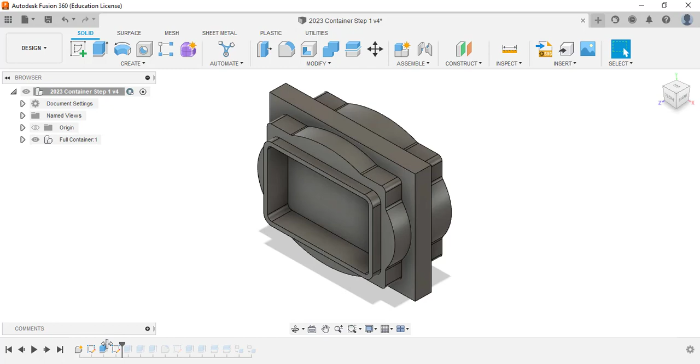So I'm going to go ahead and scroll my timeline all the way back to the beginning. The first sketch I made with the sizes that we have of our block. Now these sizes are kind of arbitrary because I would take a dial caliper to get the exact size of the block, but you could also do that in your toolpath. So either way would work. My suggestion is right now, just to make it easier, make it 4.5 by 3.5 or whatever your sizes are.

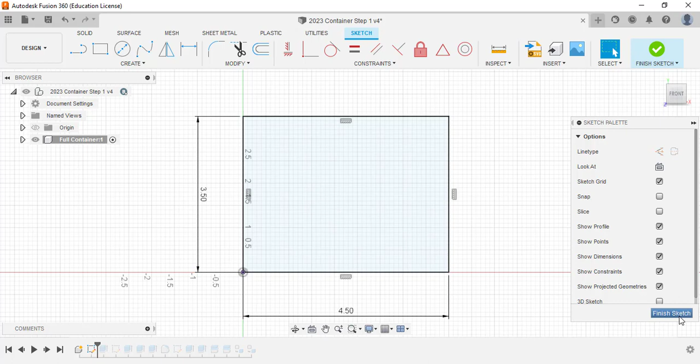After I finish that sketch, of course I extruded and I have my entire block that I'm going to deal with. Now I'm going to do subtractive modeling from here on out. Let's look at the first sketch, which is the most important one. There's a lot going on with this sketch, so I'm going to get rid of the constraints to hide some things and even some dimensions so I can see what's going on with the sketch.

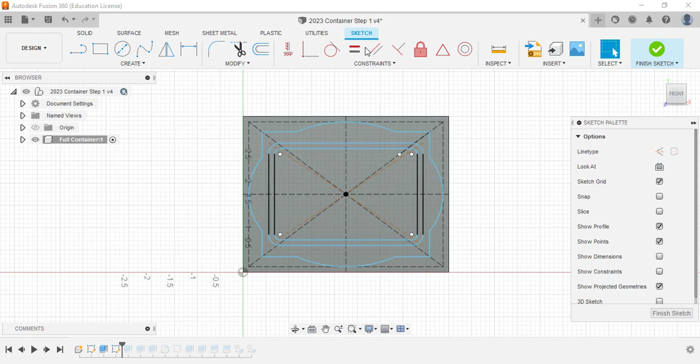First thing I did is I drew some construction lines. The one construction line is I did a box around this as a safe zone, so I make sure that I cut some material out. I did a safe zone of 1/8 inch around the whole thing, or offset it. Then I made some center points to be able to use, so I made some more construction lines. I made one that went across the middle, as you can see, on both angle and horizontal and vertical. And we'll be able to use those lines then for any reference or mirroring anything.

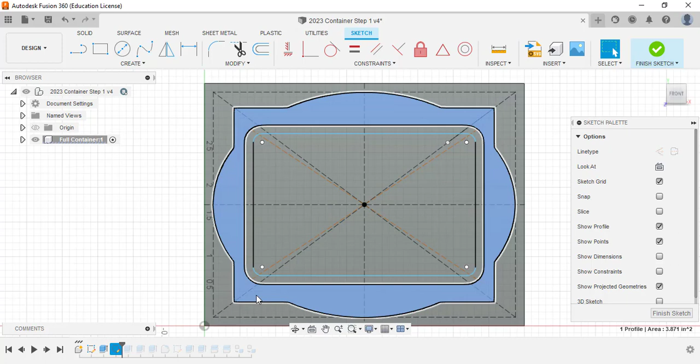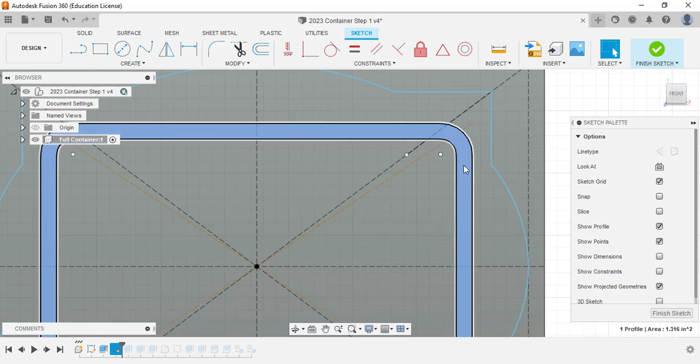And then I went ahead and made the outside design. So the outside of it, I just used an oval and a rectangle and made a unique design. The next thing I did is I made my space that I'm going to put in for the base. So I just created a rectangle, this outside rectangle here, and I added some fillets to it. How big did I make the rectangle? Well, I made it a center point rectangle, so we knew it was in the center, and I got it so it's not too close to this edge, so it would still have some strength to it.

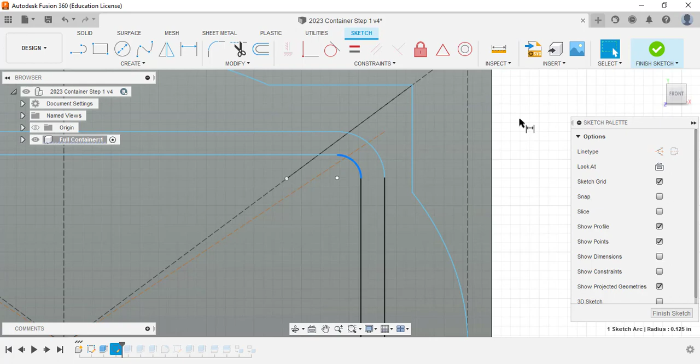And then I went ahead and I offset that to this inside one, and that is where the base is going to be. Now, the key here, and I can inspect this or put a dimension on this, is this radius dimension right here, as you can see, is 0.125. And that dimension has to be the radius of whatever tool we're using, and we're using a 1/4 inch tool, so that would still work for an inside dimension. If it was any smaller than that, it would not work. So that was key to doing that offset.

So that is the key sketch in this entire thing. Spend your time on this sketch. I got rid of some dimensions, but you can see them here. But spend your time on this sketch so you know it's correct and you know that it's what you want it to be.

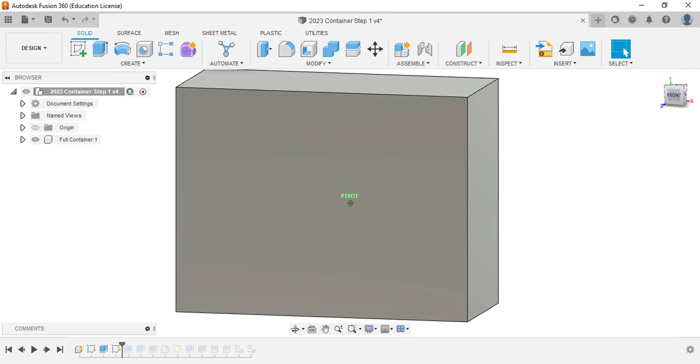The next step I did after I finished that sketch is I cut out the outside. So I'm actually going to bring this sketch into view for us. And I went ahead and I cut out the outside, as you can see from that sketch. And I went a distance 0.75, I believe. Then I cut out the middle where the actual container base is. And I want to go not as deep as the other one. So I believe I went about 0.6.

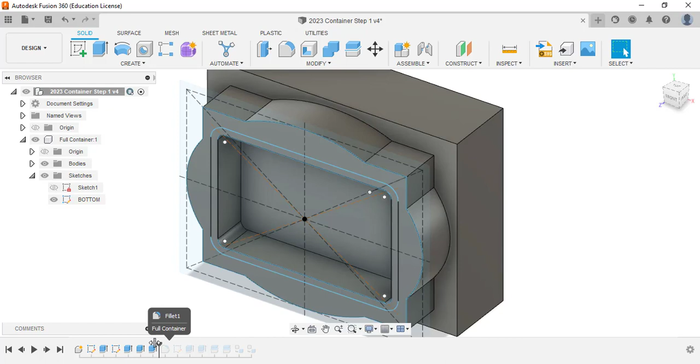And the last thing I'm going to do is cut out this portion right here. And we can see that if I hide the sketch a little bit better. And I think I went about 0.25. It's kind of where the lid or the top is going to fit on the base. So that is my entire base. Not too difficult. Start to understand how this is going to work. I'm going to swing this around.

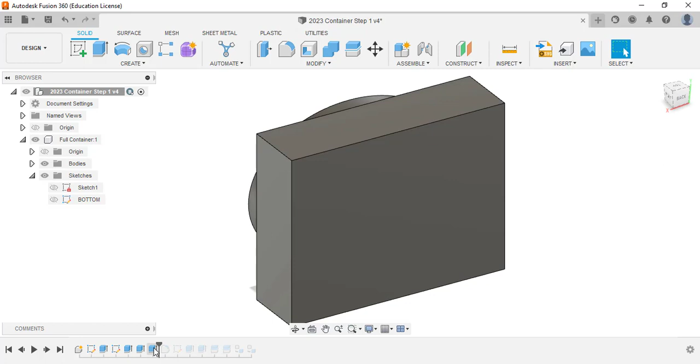Before I do that, I noticed something right when I did this, which is okay. What I noticed is these spots right here are inside corners. So it's impossible for a round bit to make the inside corner here. So what I did is I went ahead and I filleted those edges before I copied it to the other side. And all those edges got a fillet, even the outside ones, because I thought it looked a little bit better so it wouldn't be so sharp. And that is my finished base.

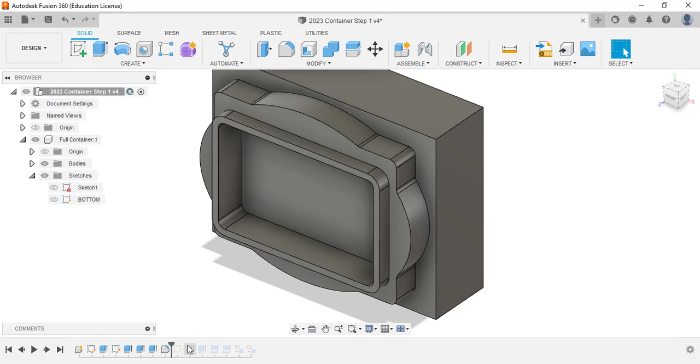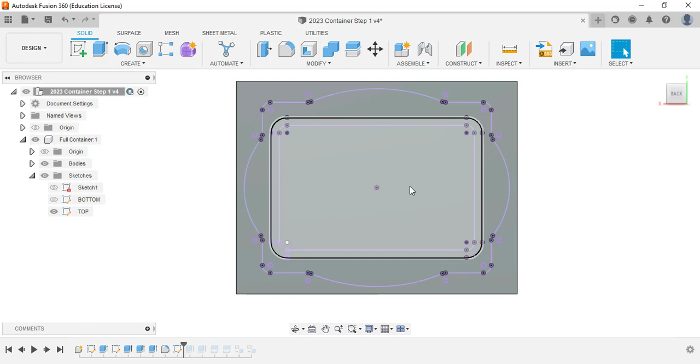The next thing I did is I created a sketch on the other side, as we will see here. And the only thing about this sketch that I needed was I projected the entire geometry of the other side over here. So let's take a closer look at that. I projected all that geometry, all right? But the real key, and I'm going to activate the sketch so we can see real close here.

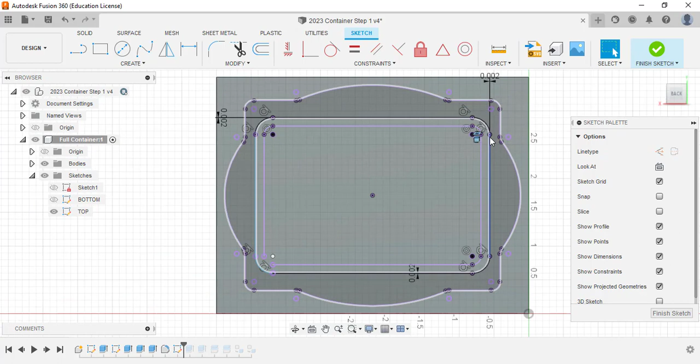The real key here is I went ahead and I offset the outside where the top is going to fit on the base. I offset that little portion. If I zoom in, you'll see that that offset is really close. And so I used the offset tool to offset it outward 0.002. And in order to make sure that I selected the correct extrusion, I went ahead and I deleted a couple lines. I deleted a line here, and I could even delete a line on the inside portion there too. And what that did is it guaranteed that I would select the correct shape there.

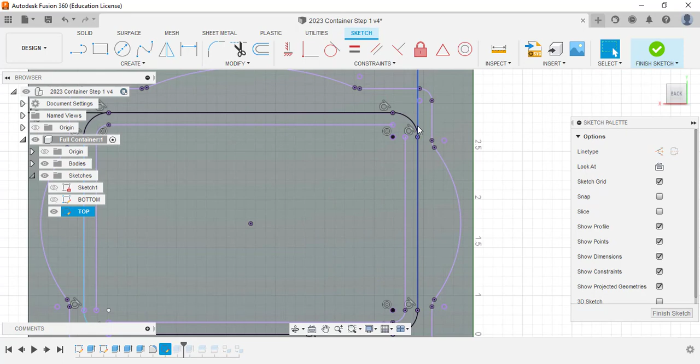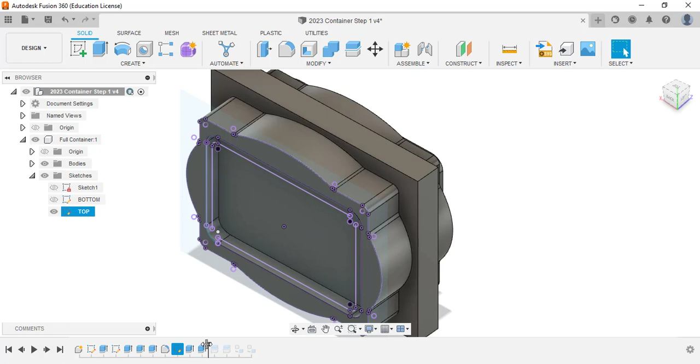After finishing that sketch, I went ahead and I extruded just the outside portion first, to match the other one, and then that inside one that I created. So I can hide that to make sure that this piece fits on the other one. And you can actually check that by highlighting it just like this and going to the front. And if I zoom in on this, you will see that that's just a little bit bigger than the other piece, so we know it's going to fit on there.

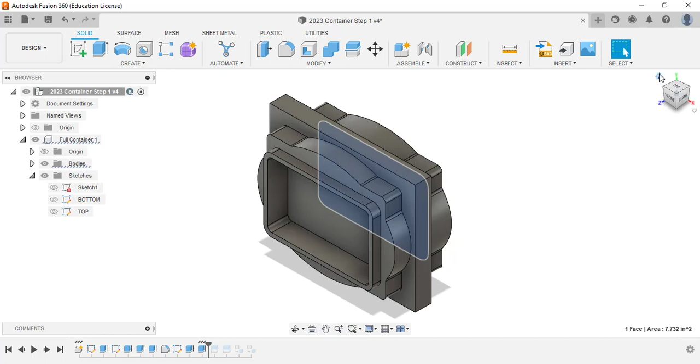But later on, we'll prove that it fits on there in a drawing sheet on our title block. So that is how I created step 1 of the container.